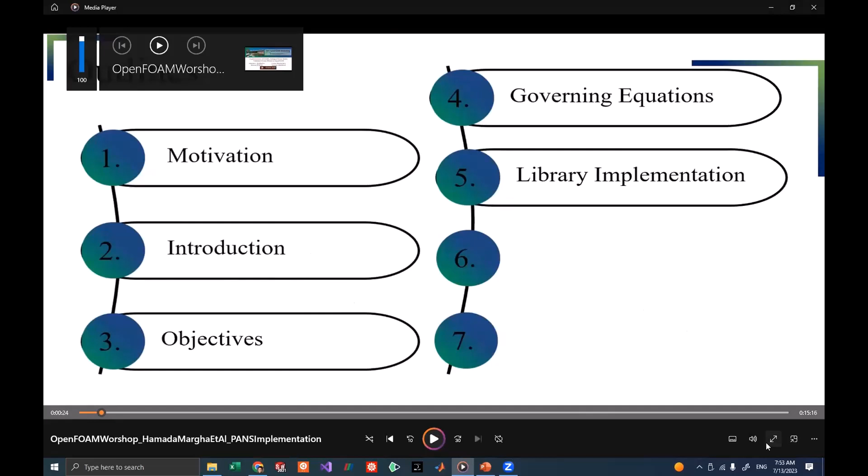You don't hear any audio right now? No, now we hear you, but if you're playing a video, we don't hear the audio from the video, I guess. Okay. Maybe. Okay. Yeah.

So hello everyone. This is Ahmed Hamada presenting implementation of partially averaged Navier-Stokes equation turbulent closure model in OpenFOAM. This work was done in cooperation with Lubna Margha under the supervision of Professor Saraj Al-Maji and Professor Miriam Forth.

The outline of this presentation starts with motivation, then we go through introduction and objectives will be stated. Next, the governing equation will be discussed, and we will go through the library implementation in OpenFOAM, and we will discuss our result cases, and finally, the conclusion will be presented.

The RANS methodology is computationally efficient but limited in capturing the full range of flow physics, coherent turbulence, due to its one-point closure approach. DNS and LES techniques provide accurate computations, but may be excessive and computationally burdensome for applications that only require coherent flow around complicated aerospace and ocean engineering applications.

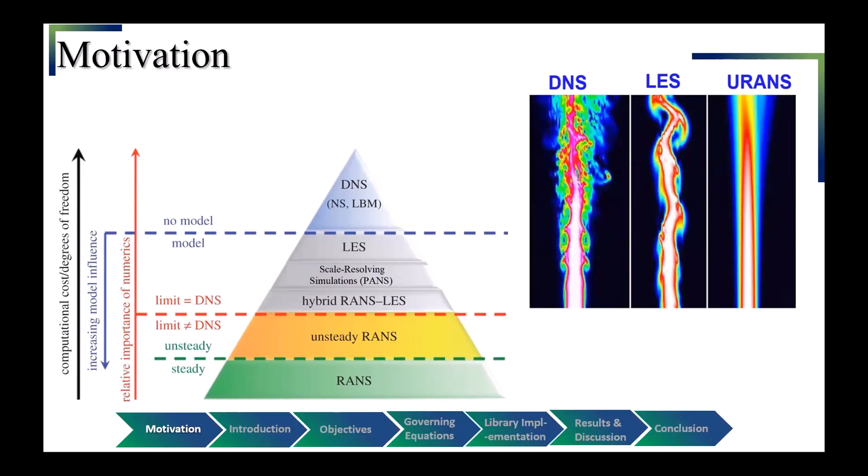So a quick comparison between RANS, LES, and DNS. You can see that RANS only focuses on the mean features, while in LES you can see the large and the medium scales of turbulence. In DNS you can see all scales of turbulence, large, medium, and small. So it's always a compromise between accuracy and computational power. So our question here, which level of complexity should be selected?

Turbulence relies on a wide range of scales. The large scale, where production happens, cannot be modeled because it depends on the shape of the geometry. The medium scale is the inertial range. It's difficult to be modeled, but it can be. Dissipation happens in the smallest scale, and this is the easiest one to be modeled.

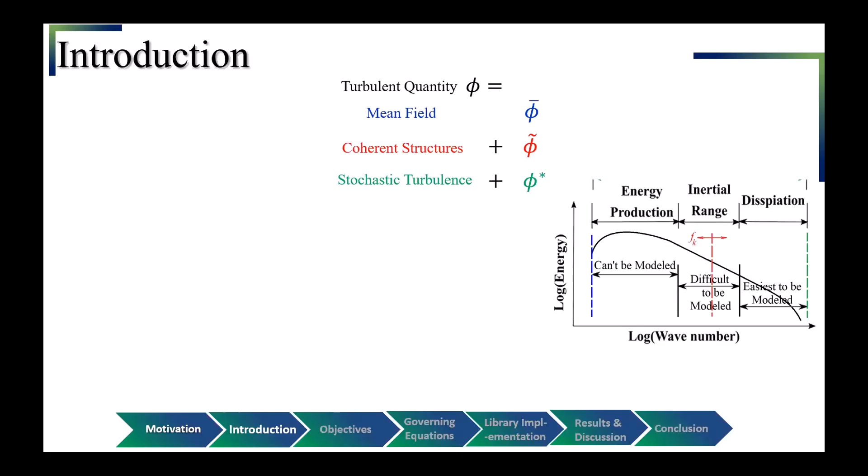So any turbulent quantity can be decomposed into three parts: the mean field, where the whole domain of scales is averaged, the coherent structure that happens over the large and medium scales, and the stochastic turbulence that happens in the smaller scales. If we combine the stochastic and coherent, we get the fluctuation field.

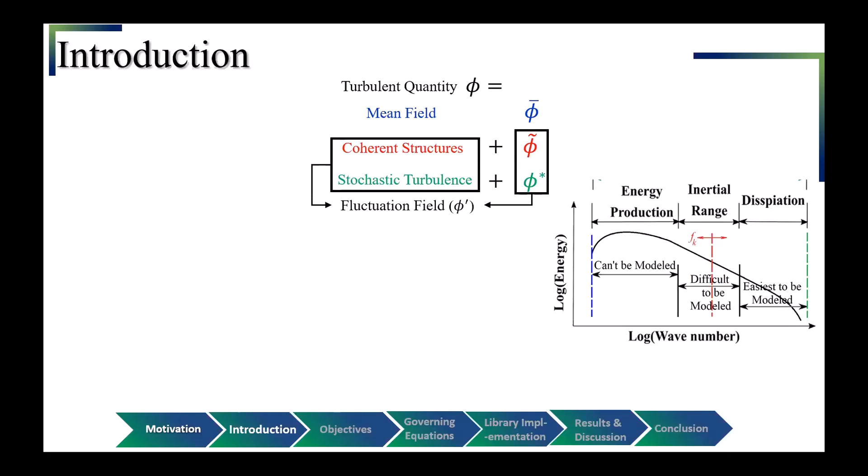When we focus only on the mean field, we get RANS by modeling the whole range of turbulence. If we resolve more large and medium scales and only model the small ones, we get LES. When we resolve the whole range of scales, we get DNS.

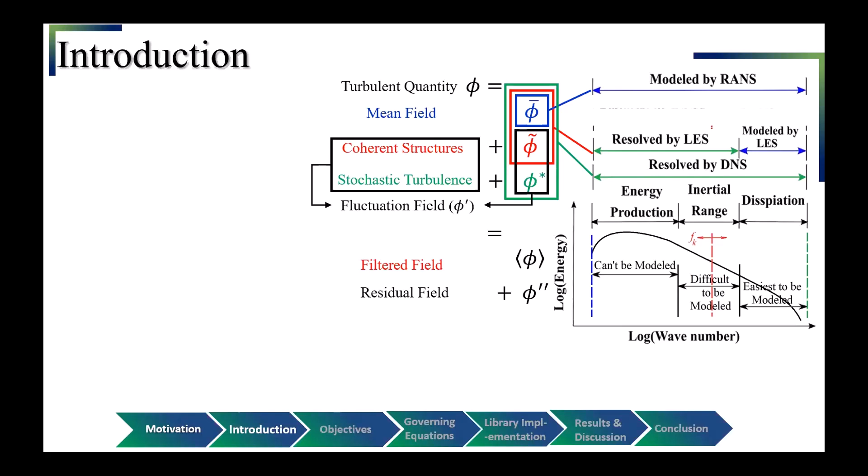Another decomposition can be made for any turbulent quantity by using a filter. The filter means that I enable some scales to be resolved and some other scales to be modeled. This gives me the filtered equations, decomposing the turbulent quantity into two parts: filtered field and residual field. The filtered field happens by PANS. So PANS divides the domain into resolved and unresolved.

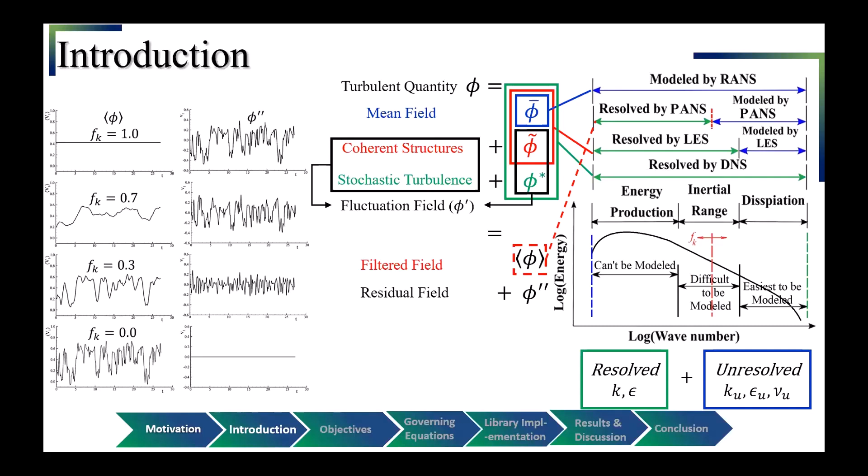A quick example of PANS: if we have a signal and consider a filter value of 1, we are modeling everything, we only care about the mean, and put everything in the residual. The residual here becomes the fluctuation, and this case is the RANS one. By decreasing the filter, we enable more resolving to happen, reaching a filter value of 0, where all the scales are resolved and there is nothing in the residual, and this case is the DNS case.

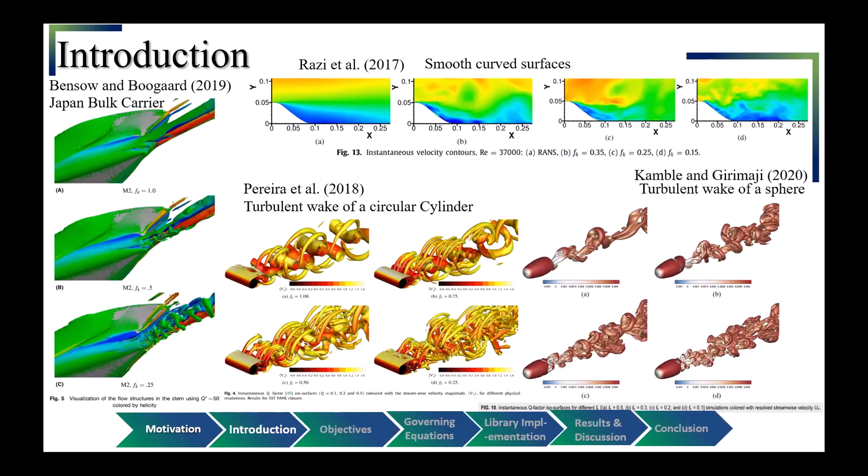So the implementation of PANS in many applications using OpenFOAM has been widely conducted. However, the implementation was achieved by changing the closure coefficient values of the used turbulence model in the OpenFOAM input file, the turbulenceProperties file, which correspond to a certain unresolved kinetic energy and unresolved dissipation filter.

So our objective is to build a PANS turbulence modeling library in OpenFOAM, in which the evolution equations of the turbulent kinetic energy and dissipation in k-omega, k-epsilon, and k-omega SST models are adjusted by just defining the PANS filter, to provide simplicity for OpenFOAM users to implement PANS turbulence modeling in their simulations, obtaining more accurate results than RANS.

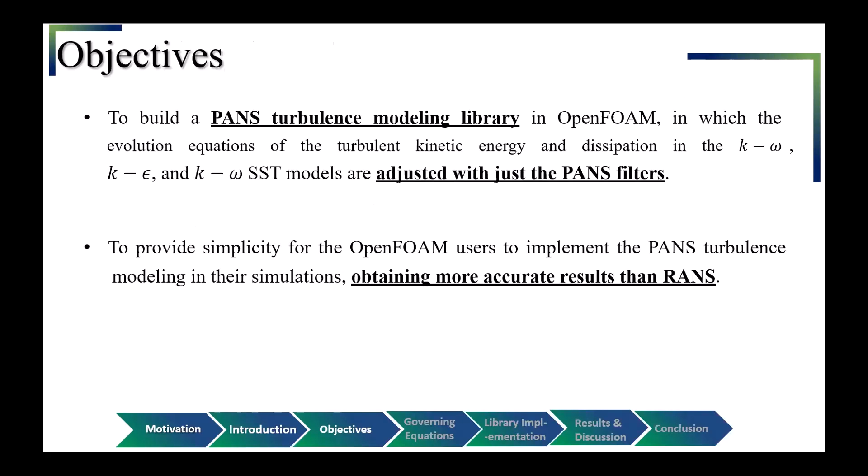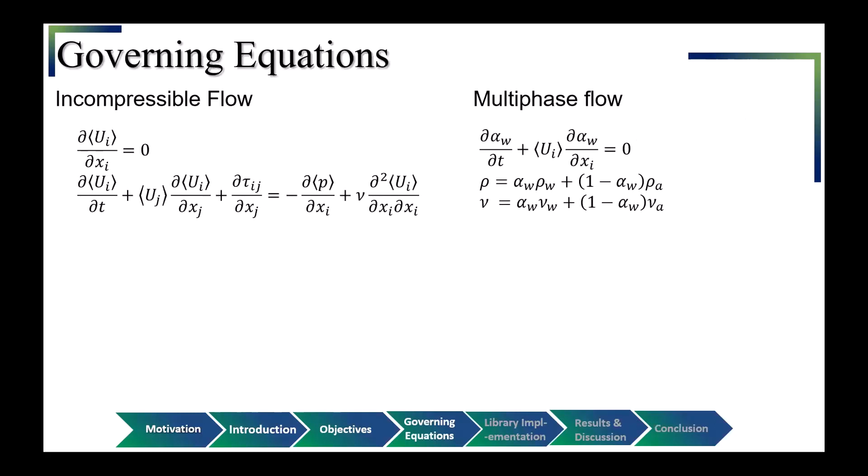For the turbulence modeling, the generalized central moment is defined as the multiplication and sum of a bunch of filtered and residual quantities, and it can be modeled by the Boussinesq approximation using negative 2/3 k, etc. The PANS filters Fk and F epsilon are the ratio between the unresolved part to the whole domain, and F omega can be defined based on F epsilon and Fk, based on the relation between omega, k and epsilon.

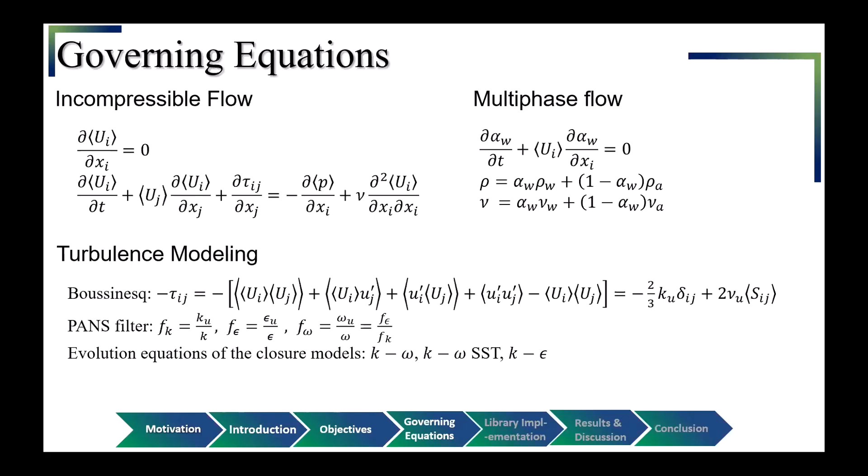The evolution equations for the closure model here are developed for a constant Fk over the whole domain. And this can be easily done to generate these governing evolution equations for k. You can see the edit happens in the transport part. There is F omega over Fk for k-omega and F epsilon over Fk squared for k-epsilon. And it's affecting the dissipation equations in two parts.

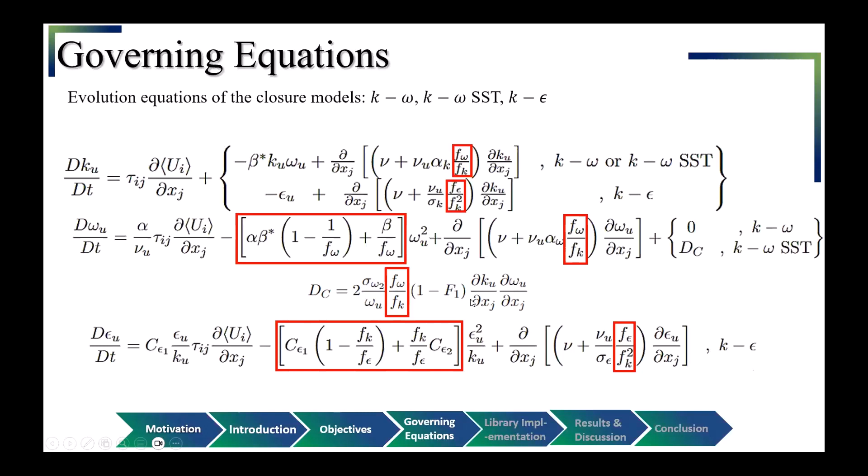The first one is in the sink of the dissipation, the second term here or here. And it's also affecting the transport of the dissipation, as you see here. And for k-omega SST, it's also affecting the cross diffusion term by this factor.

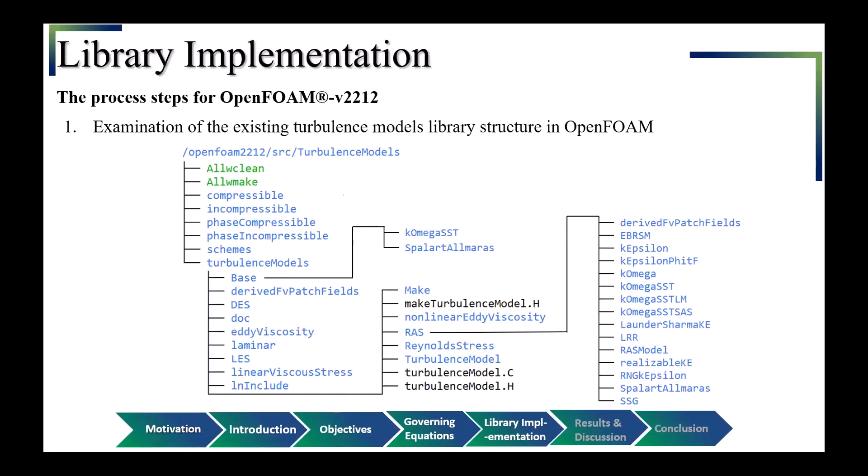So what's the process for implementing PANS in OpenFOAM? Firstly, we examine the existing turbulence model library structure in OpenFOAM. We can see that our model is generalized in two parts, the RAS one and the base one. The next step is to define these modules and generate our PANS subroutines and their own file dependencies.

Then we go through defining the PANS filter in our code. This is done by declaring the filter values in the H file and giving them a default value of 1 if not given. And of course, if it's given, OpenFOAM will use the given value by read if present.

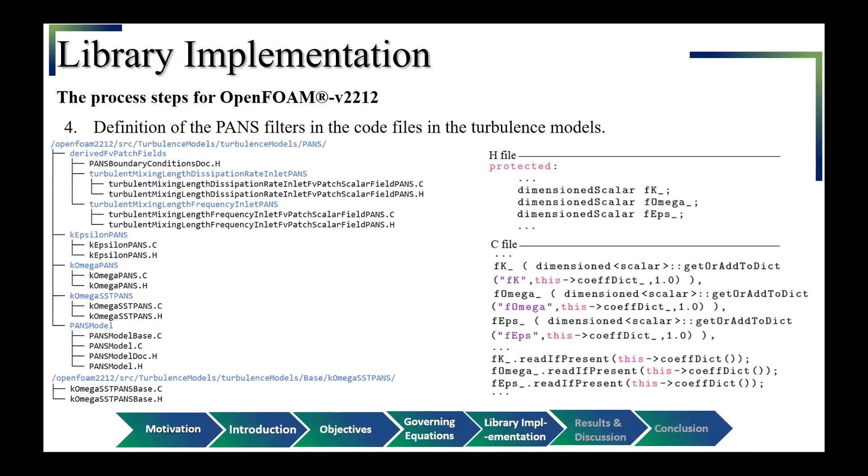And then we implement the PANS model by adjusting the transport part in the evolution equations, as you can see by these factors, adjusting the sink of the dissipation, as you can see here, and adjusting the cross diffusion term too.

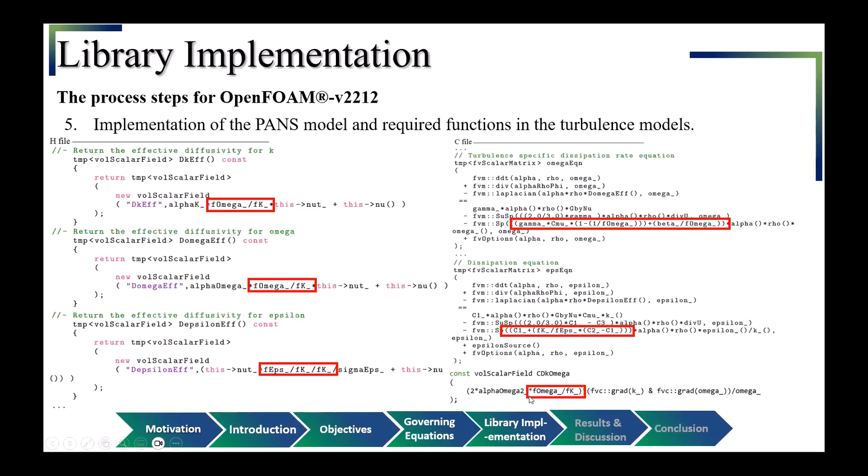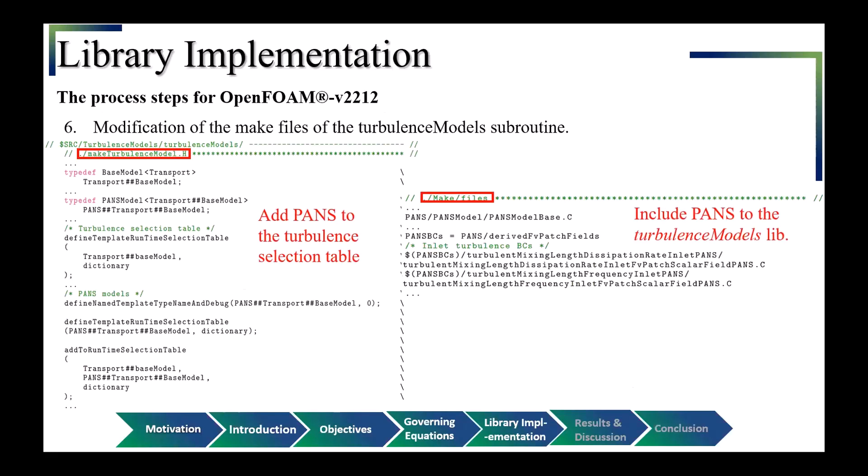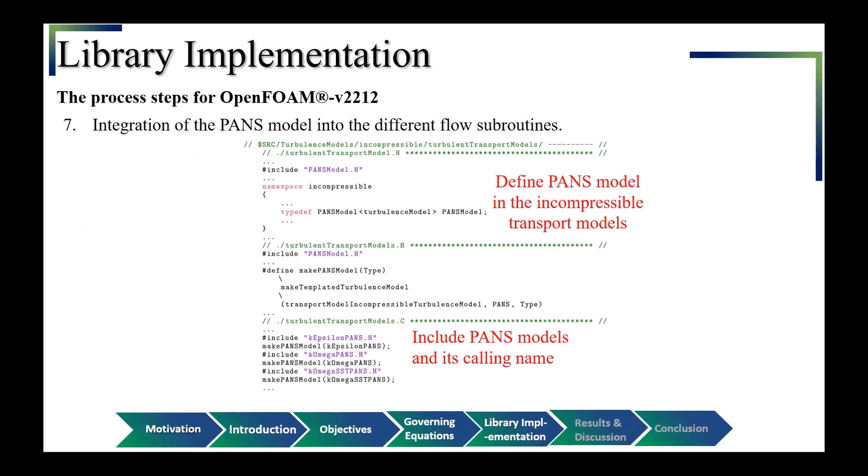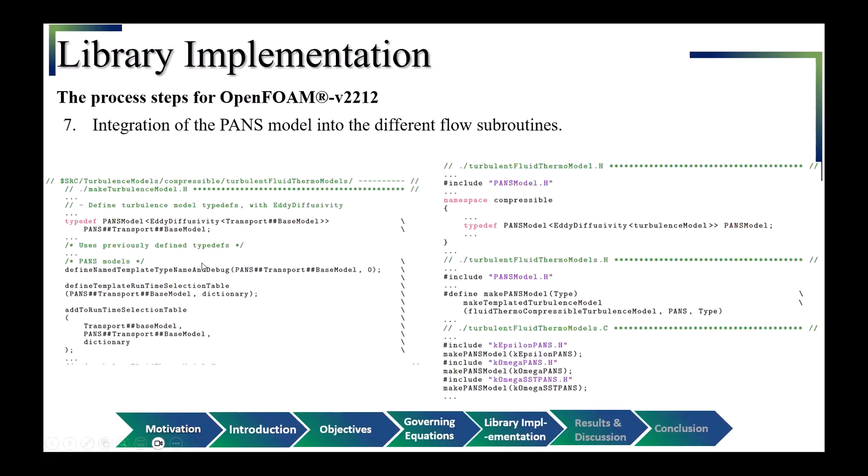Then we modify the makefile to add PANS to the turbulence selection table and include PANS in the turbulence models library. Next is to integrate PANS into different flow subroutines. We have incompressible and compressible, and this will cover multiphase too, by defining the PANS model in the incompressible transport models, including the PANS model and calling its name. I just call it by adding PANS at the end, and we can do it for compressible flow again. But in compressible flow, we need to define the PANS model in the make.h.

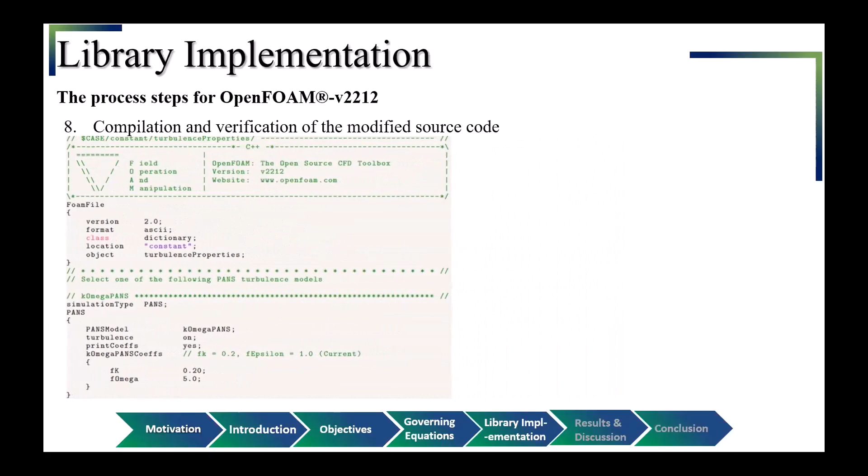Next, as a final step, is to compile and verify, and luckily this went very well for us. So, verification. A verification process was carried out to establish confidence in the developed PANS technique in OpenFOAM and its correct functioning before proceeding to further computational analysis and discussion. This process involved comparing the results of two turbulence model simulations. One used the RAS model and the other employed the PANS model with unity filter. So we are using RANS simulation for both RAS and PANS.

And another comparison was made between a RAS simulation in which the turbulence model coefficients were manually adjusted in the input file, the turbulence properties, so we are adjusting the coefficients there for a certain filter Fk of 0.2, and a PANS simulation by just declaring the filter value of 0.2. This is done for a simple problem, turbulent flow around a square cylinder.

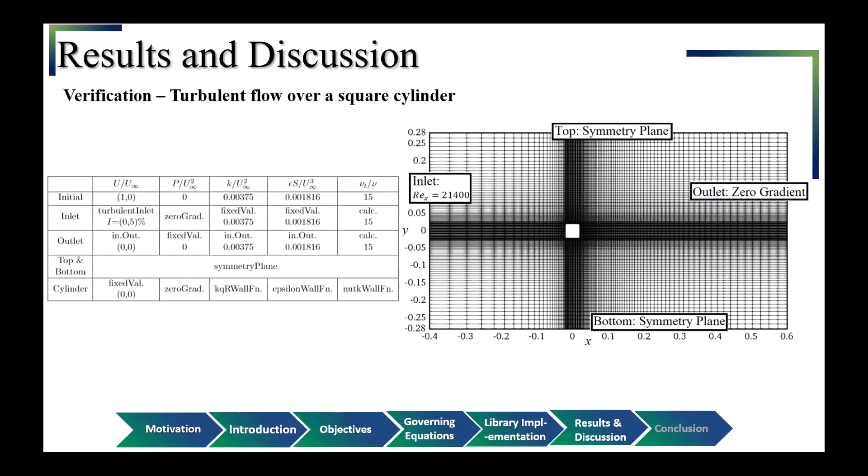This is what the mesh looks like. It's a very basic mesh, but it's just used for the sake of verification, not for solving the problem itself. And this is the boundary that we used, and showing the results. As you can see, the RAS one and PANS with Fk and F epsilon of 1, so this is a RANS simulation, are identically the same. There is no change here in the first line and in the third line for CL, CD, and CL over CD in the frequency domain, showing the dominant frequency and also the power spectrum.

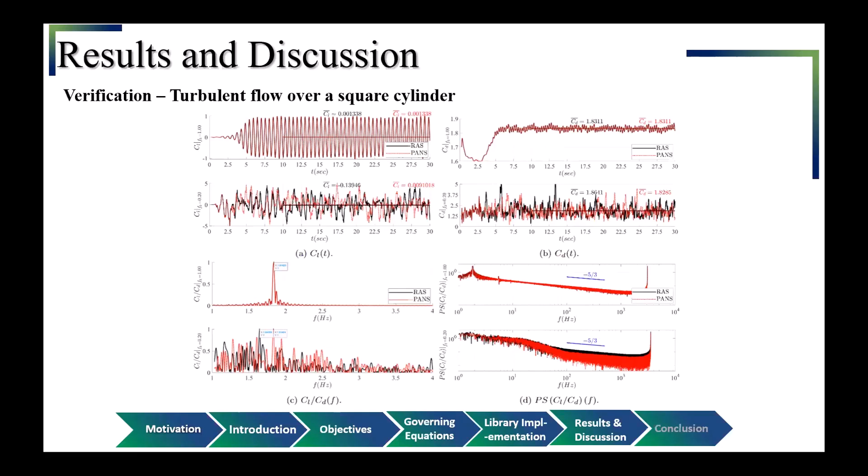But when we go to Fk of 0.2, we can see that it's different between the RANS one and the PANS one. The reason is that when we define the turbulence coefficient in the RANS one, adjusting it manually, of course we use round-off. We cannot type the whole 16 digits of the coefficient, and this causes a deviation between running PANS by just declaring the filter value and the RANS one by adjusting the coefficients manually.

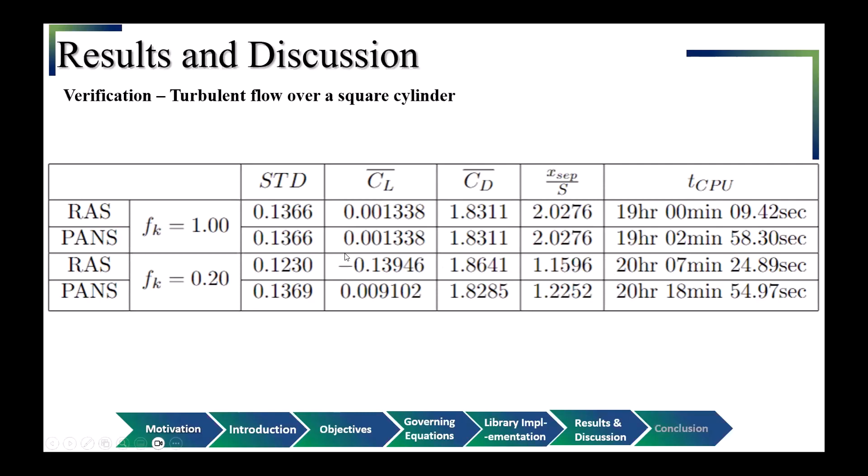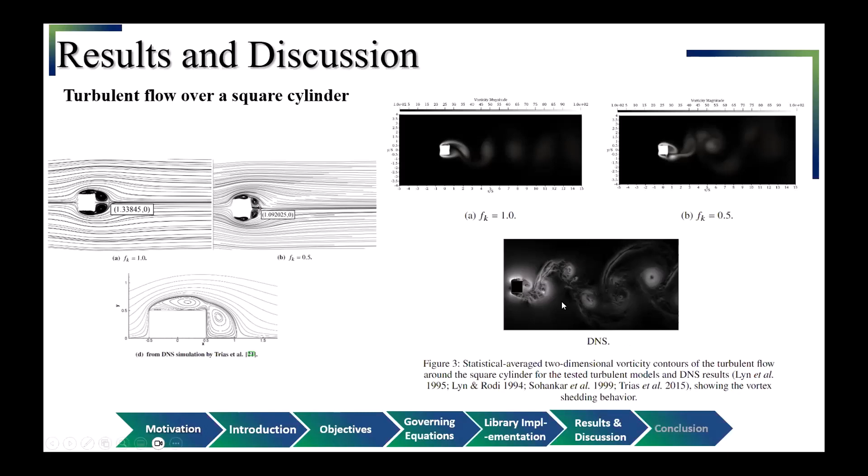And also for vortex shedding, it's only appearing in rounds because this is averaging all the frequencies to present only the dominant frequency, which is vortex shedding. But in reality, there is some vortex stretching. This happens in DNS, and some of the vortex stretching appears in FK 0.5.

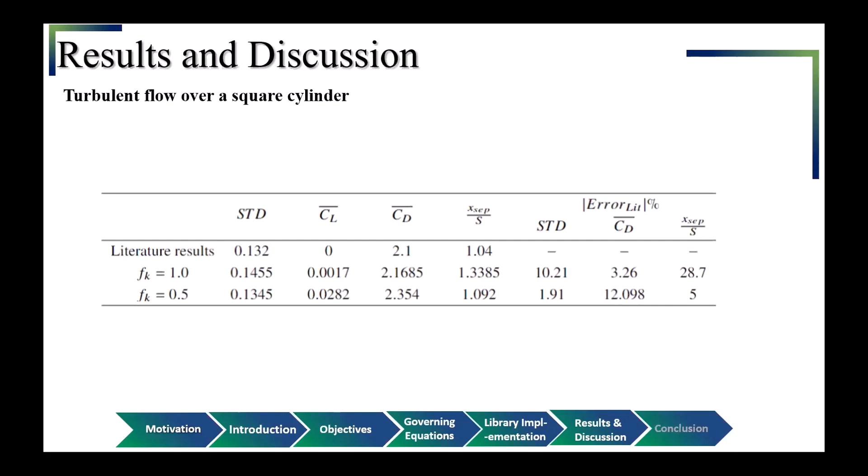Going for numerics, some numbers. As you can see, this is the literature, the DNS one, and the values of FK 1 and 0.5. You can see the error for the separation point decreased from 28% to 5%, and for Strouhal number from 10% to 1.9. There is quite a deviation in the CD mean, but this can be solved by taking more turbulent simulation time, or adjusting the mesh near the square cylinder. So PANS proved its case for incompressible flow.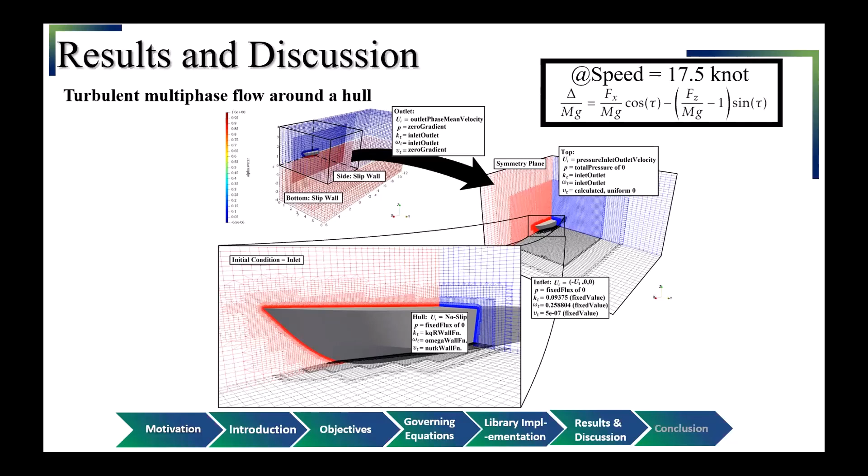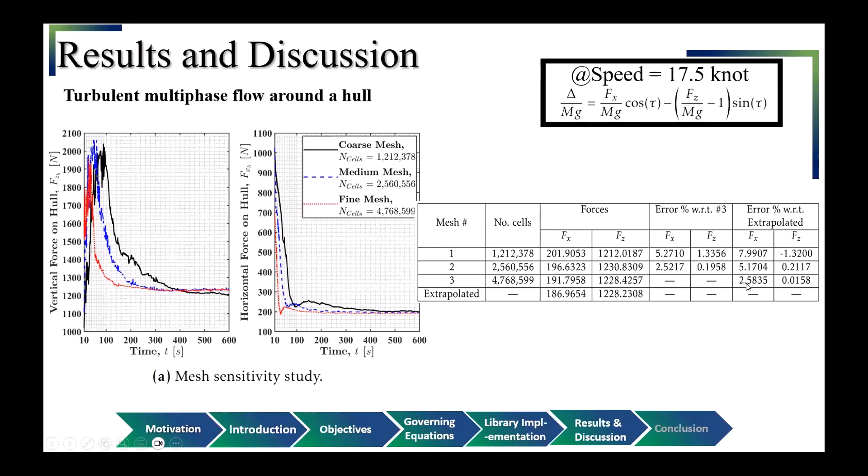Firstly, we did a mesh independence test, coarse, medium and fine. As you can see, the result is converging after the medium, but we stick to the fine for our simulations. The error decreased, with respect to mesh 3, the finest one, to 2% and 0.19. And when we use Celik et al. and the Richardson extrapolation technique, we find the error in the fine is 2.5 and 0.0158.

Then we go for PANS. As you can see, by comparing our result with experimental data, the error decreased from 50% to 2.7% when we switch from RANS to PANS with FK of 0.2.

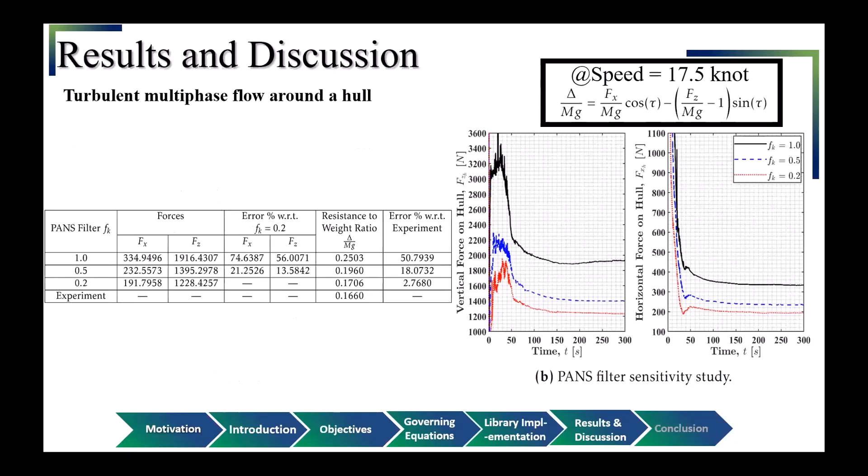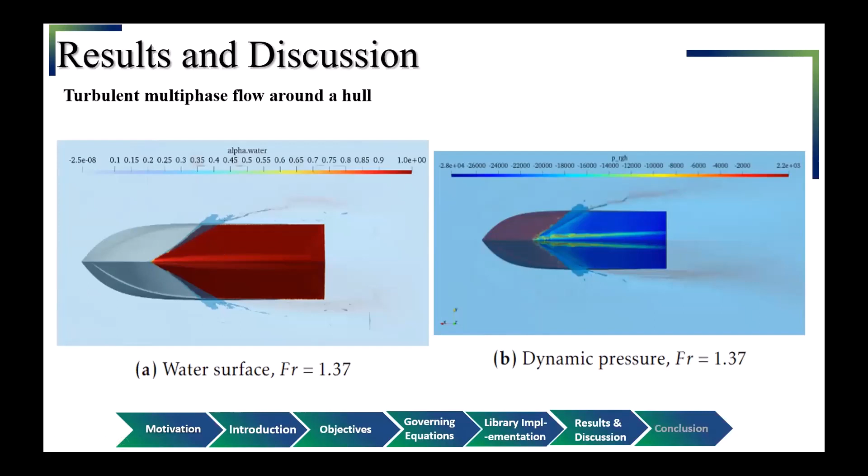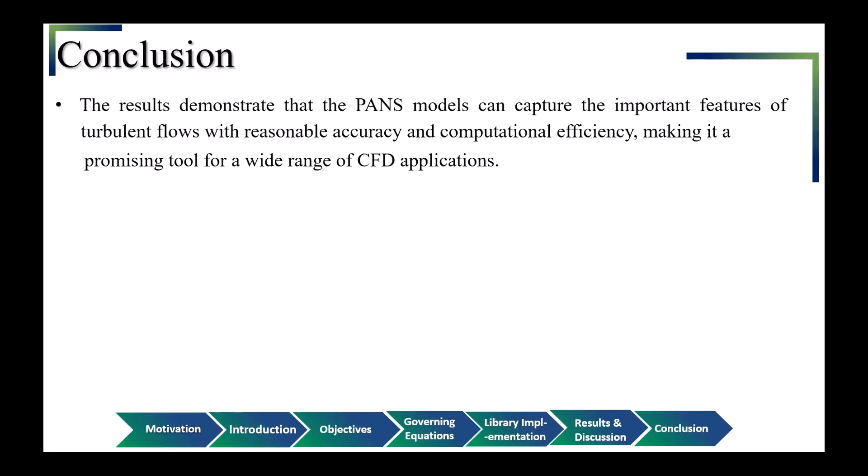So our conclusion: the results demonstrate that the PANS model can capture the important features of turbulent flow with reasonable accuracy and computational efficiency, making it a promising tool for a wide range of applications. Overall, the implementation of the PANS model in OpenFOAM provides a valuable addition to the existing turbulence model capabilities of this widely used software package, avoiding user faults in editing the turbulence input file, and spreading knowledge of the PANS technique among the OpenFOAM community.

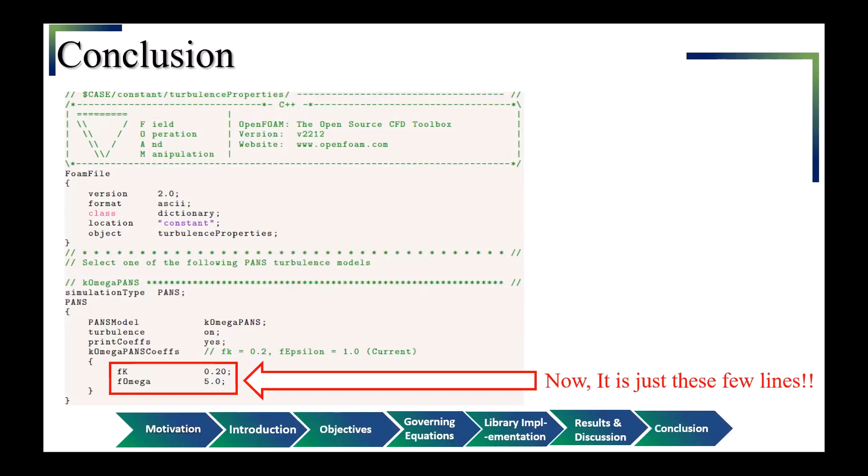So our conclusion in a very short message: we can use PANS by just defining the Fk and F omega, or F epsilon for the K epsilon technique. Just a few lines we need to define.

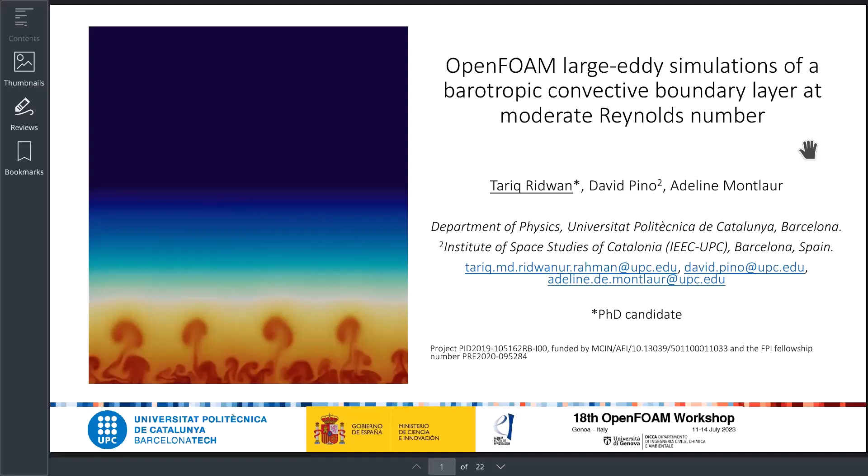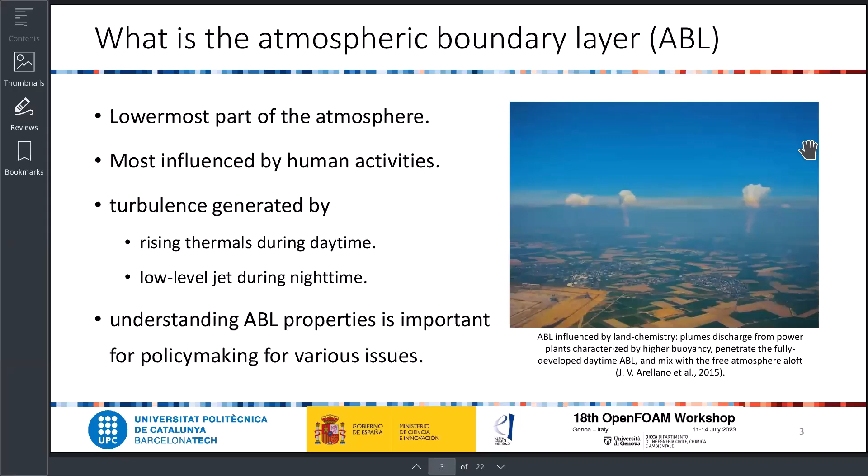So pretty much everything needed for human civilization is in the atmospheric boundary layer. So understanding the turbulence properties of the atmospheric boundary layer is of paramount importance. So the motivation of this work is to investigate LES. But before that, as you know, the ABL is a very complex and multi-scale nonlinear flow. So to understand its inherent coherent structures, we need high fidelity methods, at least LES.

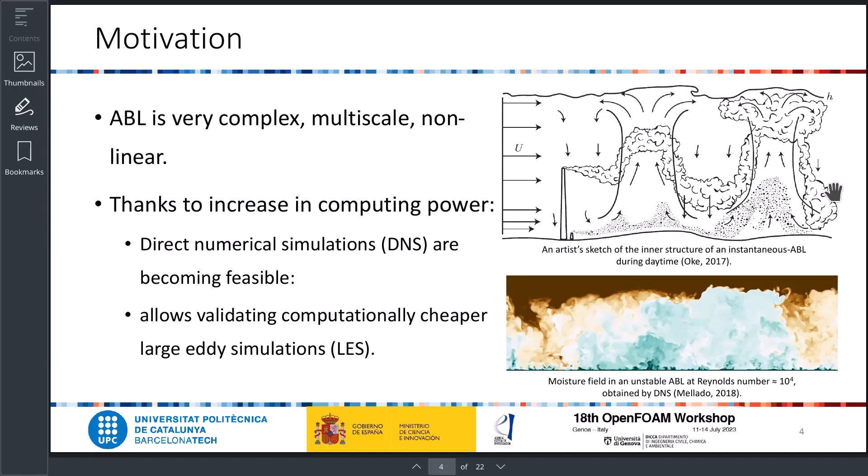However, as DNS is really expensive, until now DNS investigations of the atmospheric boundary layer are limited to Reynolds numbers of order 10 to the power 4, and limited to idealized configurations, not real-life ones. So in general, LES and RANS are preferred by academia and also in industry.

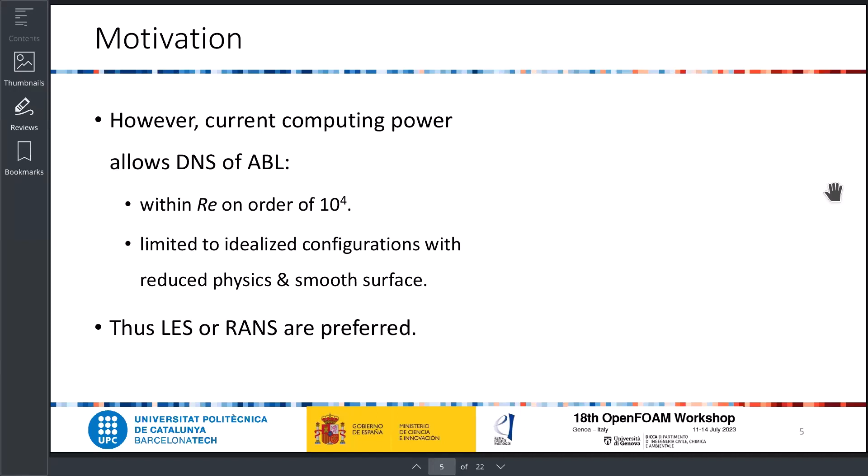However, DNS are still useful because ABL turbulence properties become Reynolds number independent after a Reynolds number of 10 to the power 4 is reached. So thus the turbulence properties captured by DNS in the simplified configuration are still valuable for development and validation of numerical models, especially for LES.

So although LES have been conducted for the ABL since the 1980s, until now the stable atmospheric boundary layer is still a challenge, mainly because of 2 points. The largest energetic eddies in the stable ABL are very small, approximately 1 meter, whereas in typical LES of the ABL, people generally use 10 meters. So it needs very fine resolution, and also requires a large computational domain.

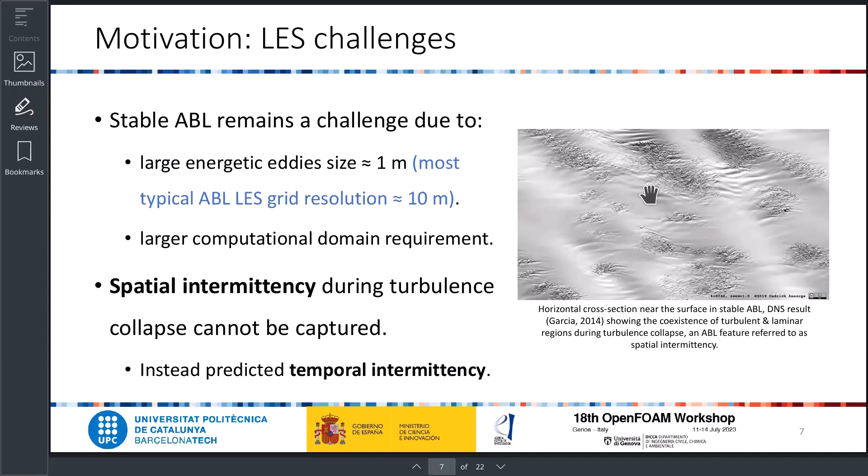Rather, they predict temporal intermittency, meaning in the whole domain they predict turbulence, and it is gone again after some time, and then the whole domain has a laminar flow. But in reality, it is spatial intermittency, meaning the turbulent and laminar parts coexist. And if the domain is not large enough, then it is very difficult to obtain this feature.

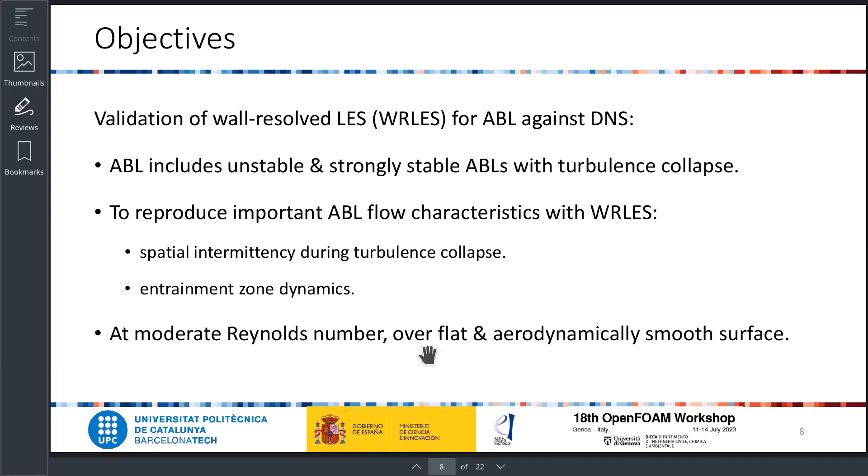So to address this challenge, I first started with wall-resolved LES. The aim is to capture spatial intermittency, so the idea is to do an atmospheric boundary layer with unstable and also a mixture of stable and unstable parts. The stable part will have the spatial intermittency during turbulence collapse, and that feature needs to be captured. And as there will be some interaction in the entrainment zone between the unstable and stable layers, that needs to be captured as well. And obviously, it should be at moderate Reynolds number. To simplify the case, it should be on a flat and smooth surface, not on a rough surface to begin with.

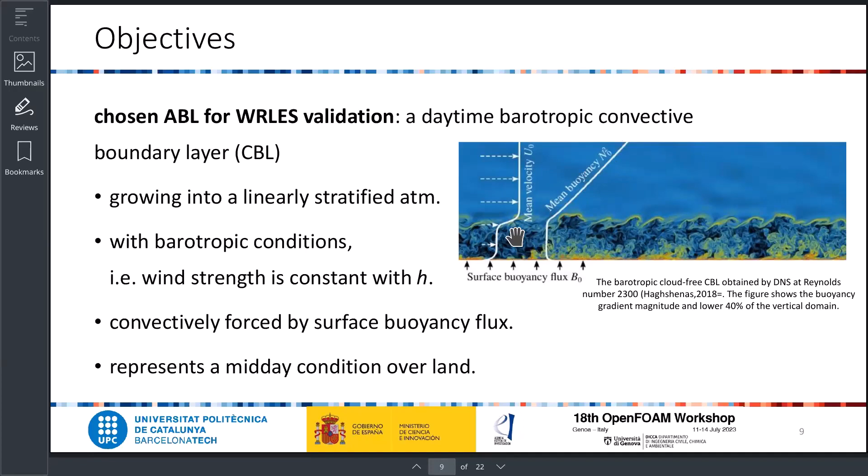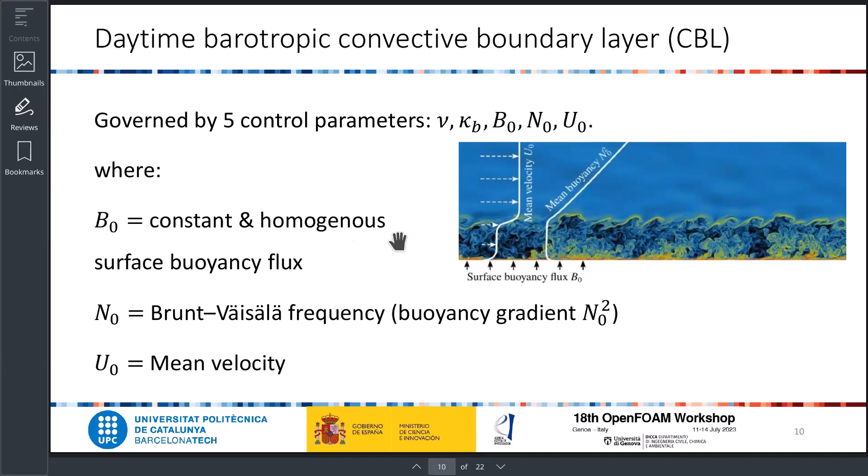And this DNS work is mainly governed by 5 control parameters, you know, the nu and kappa, and there are 2 more especially. The first one is B naught, which is a constant and homogeneous surface buoyancy flux, and N naught is representing the buoyancy gradient. So to put it into perspective, we have stable and highly stable ABL.

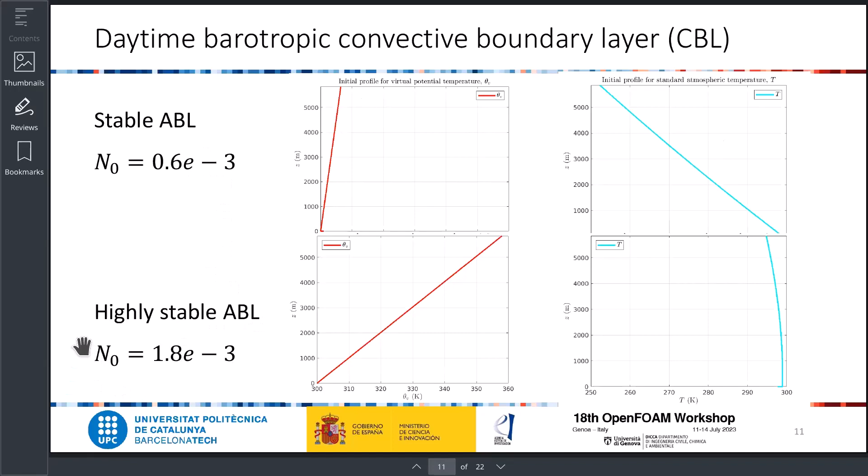So when the N naught value is really high, as you can see, the virtual potential temperature is representing a highly stable ABL, and at the right hand side we have the temperature profile only, that is straight, which is the highly stable. And on the contrary, for the stable ABL the virtual potential temperature is going directly almost upward. So these are the differences between stable and highly stable, represented by the N naught. And here in our case, we are considering the highly stable part. I am not sure if I chose the correct one, but I thought to begin with the highly stable part.

And in the case setup, as it has heat involved, I chose buoyantBoussinesqPimpleFoam, and schemes are first order. The boundary conditions have this ATM turbulent heat flux temperature with the general daytime heat flux from the earth. And it is a 2D setup as we are doing wall resolved, although it is inherently a 3D flow. But as we are doing wall resolved, we wanted to begin with 2D to reduce the computational power and see what we get at the beginning.

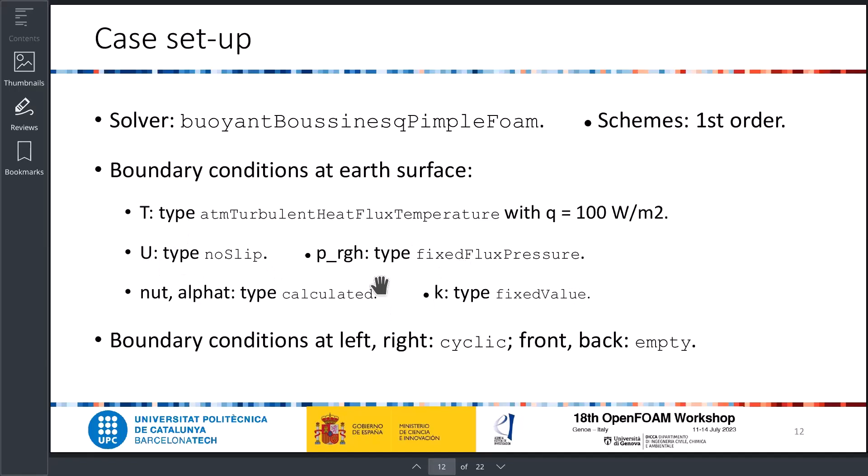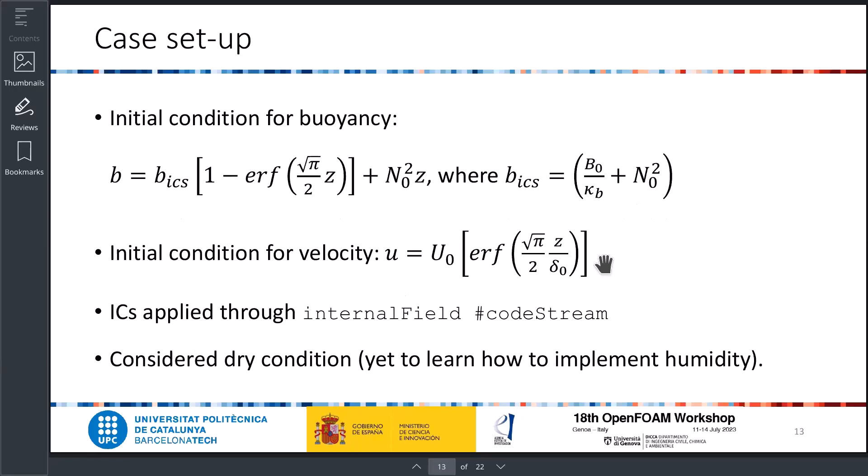And these are the boundary conditions applied for the other parameters. And here are the initial conditions for buoyancy and velocity, and these are applied through internal field codeStream. And as I'm yet to learn how to implement humidity in OpenFOAM, I'm going with dry condition, meaning there's no humidity, only dry air.

And the grid, it is considered a 4.3 by 5.85 kilometer domain. So 4.3 is in the x-axis and the height is 5.85. And we have this number of cells in the x and y axis, and almost 262,300 cells in total. And dx is 5 meter, and delta y is at the surface, as we are trying to do wall resolved, so we really wanted to catch y plus equals 1. So at the surface, it is 685 millimeter delta y, and it ends with almost 28 meter at the top.

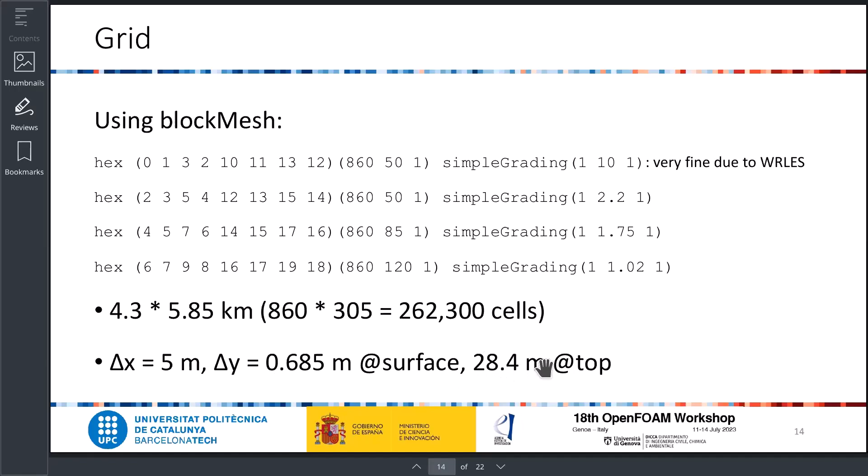And the results: we have here at 1620 seconds, which is almost a half hour, we can see the thermal plumes that are coming from the earth surface, and there's this Ux component of the velocity. And as we chose the velocity u equals 1.8, it is pretty much maintained in the free atmosphere, and as there's the boundary layer at the bottom, we have this gradual increment.

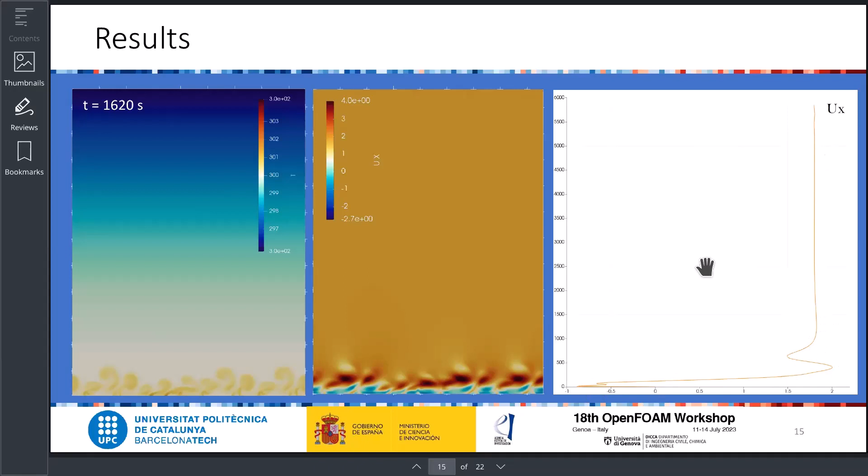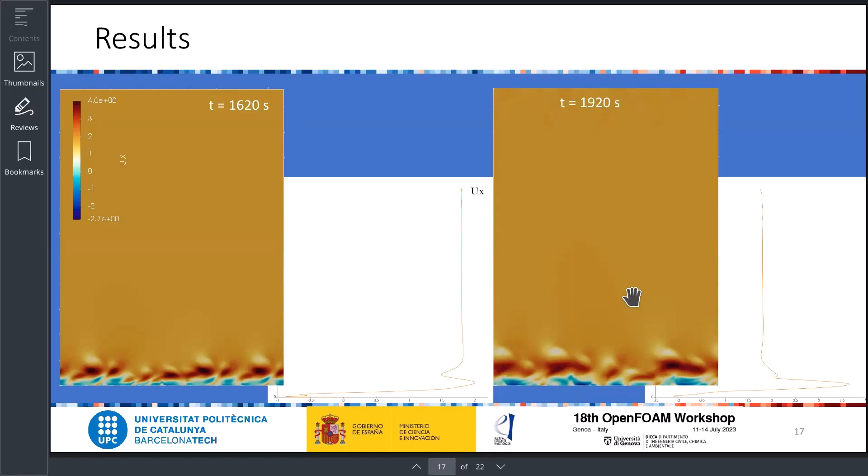However, this is the LES result, so as we go with time, as a convective boundary layer, it should come into a steady state, the mean value, because it is a convective boundary layer, so everything is mixing up, and adding everything, it should give a constant value. As I thought at the beginning, maybe it is approaching there, but after some time it showed some high velocity at the bottom around 100 meter, 500 meter, and eventually it collapsed, and the result became really bad, and it got stable in a totally unphysical fashion.

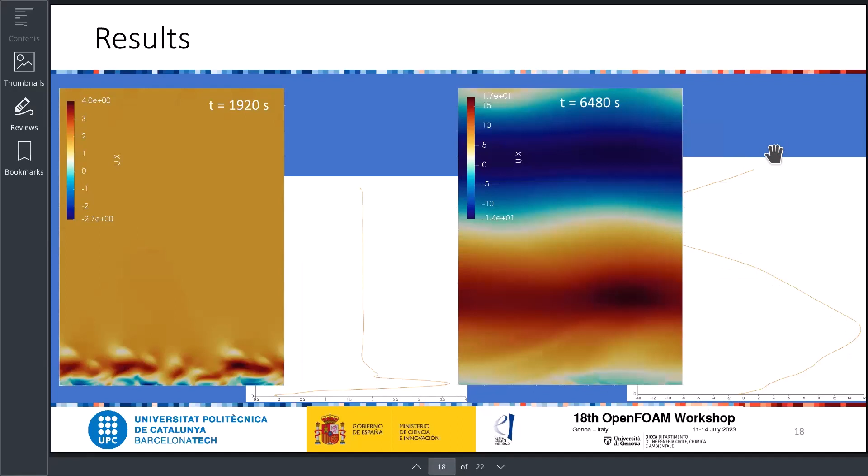So we have this pattern now, where the Ux value is really high, and then it goes to the left, and it should not be happening. What should happen is it should linearize. It should get a constant value throughout the domain.

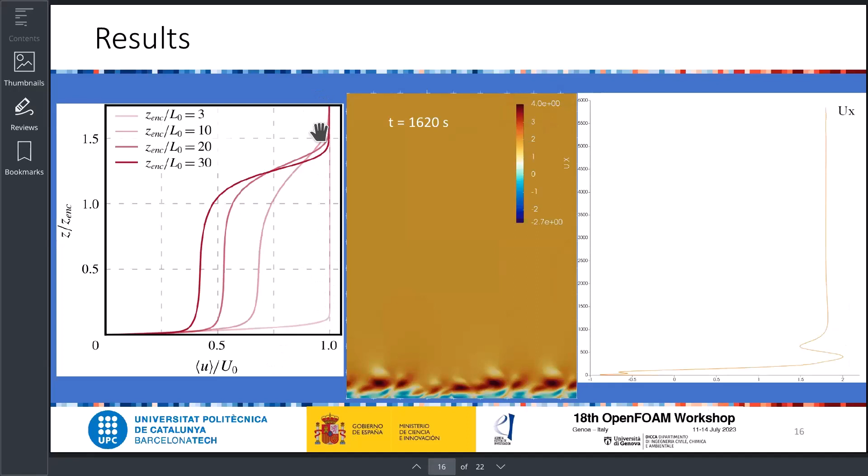And if we consider the temperature profile, we have the plumes coming, and it is increasing, but in the final time step, it is really messing it up, and a really unrealistic result. So this is what we have. We are stuck at this point. Now we're investigating what steps to take next.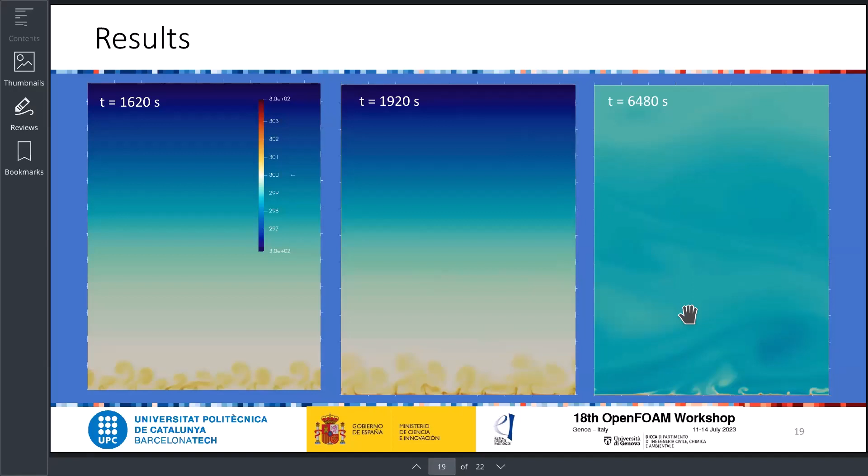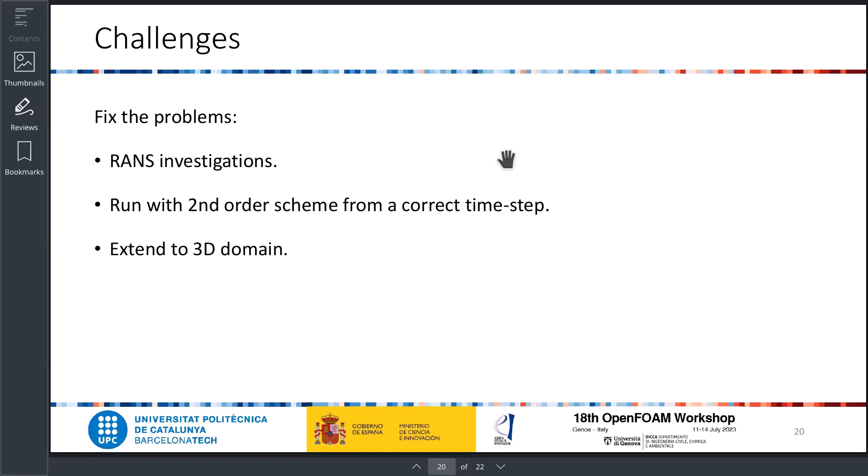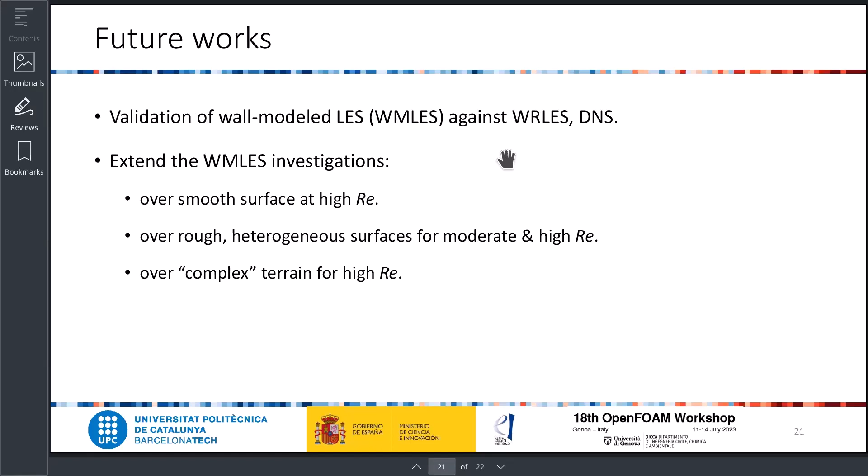Our thought is to fix the problem by analyzing the RANS investigation and run with a second order scheme from this time step to see if it goes correctly, and extend to a 3D domain, because it is a 3D problem, and solving in 2D makes it prone to error. And in future work, the aim is to extend towards wall-modeled LES, and then investigate it for smooth, rough surfaces, heterogeneous surfaces, and possibly complex terrain for higher Reynolds number.